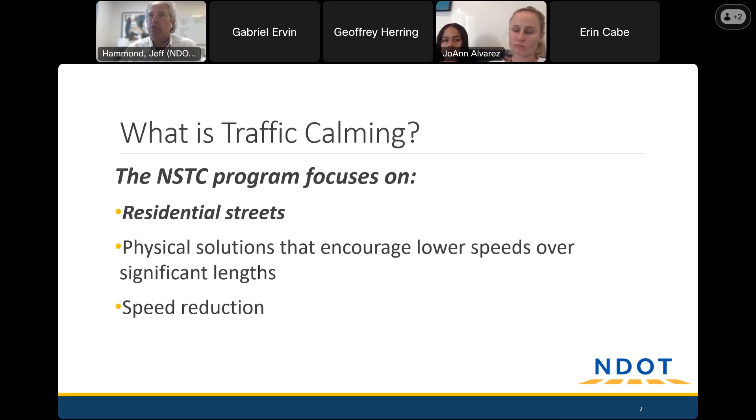We try not to do that. We try to implement measures that will make people slow down, but not necessarily push them to other streets. That's not one of our objectives.

How Oakley got inducted into the program is that it follows a pretty set procedure. There was an application placed by the neighborhood or individuals within the neighborhood.

That can go back several years. I don't know exactly when Oakley's application came in, but often we have neighborhoods where someone put that application in several years ago. Every time we get applications in, we go out and collect data on the street.

The other 30% comes from some of the other users on the street, most commonly pedestrians.

So if you have a sidewalk, you get lesser points than if you don't. You all don't have a sidewalk, and that helped boost your score.

If you have destinations that might make sense for people to walk to more, like a school or a park or a library, something like that, your score also goes up for that.

And then there's another 15% that deals with whether there's a documented instance of a crash on the street. So we take that data, roll that all together, come up with a score.

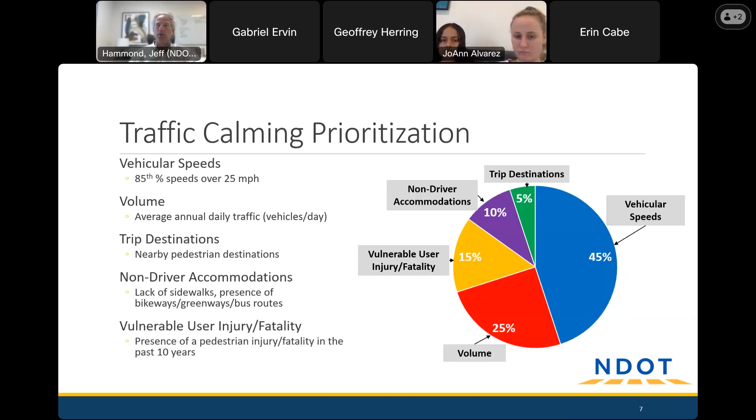Here's some of the data specific to Oakley. By the way, we are going from Trousdale to virtually the end of the street there at Cochran. The speed that we recorded was 35 miles an hour. That 85th percentile is really a statistical way that we in the industry document those speeds. What that says is that 15% of the traffic out there is going faster than 35. So that's all a relative ranking that we use. The traffic volume is about 1,200 cars a day, and the width, I alluded to earlier, is fairly narrow, but not uncommonly narrow - 20 feet wide.

It's kind of standard for our streets. It's actually a little narrower than what today's standard would be. That's a good thing when it comes to speed reduction. The wider the street tends to encourage faster speeds. So we like working on a 20-foot wide road. And then the length of our project is about a half mile long.

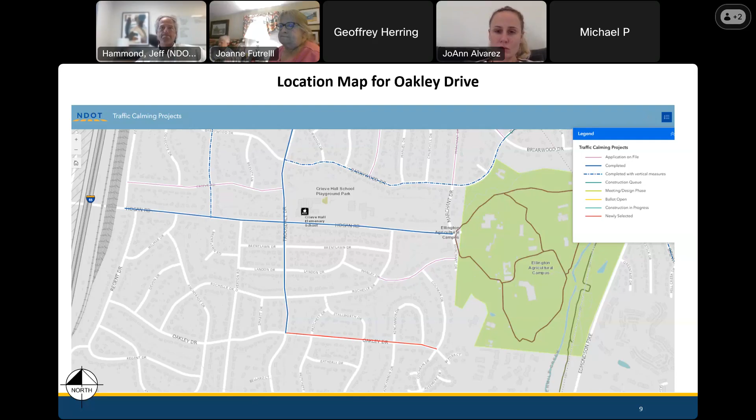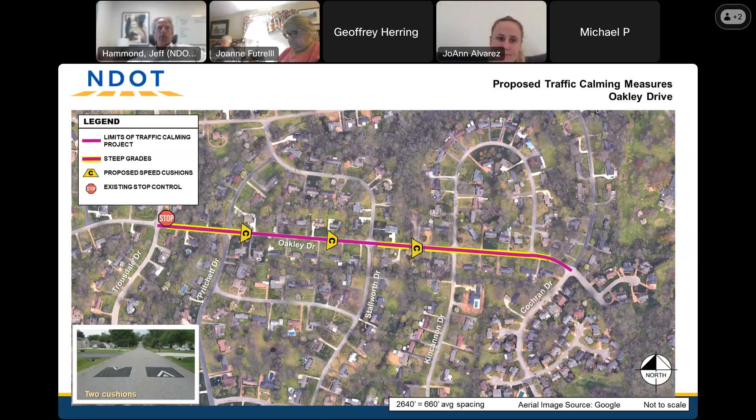I can show you, and this isn't public yet -- we'll be putting these online, but we typically don't do that until we get through these meetings and see if you all have any changes or things you want to tell us about. This is a little more advanced than what we saw at our last meeting; we've done more of the site work. Part of the project will be, we'll come back in.

I know there are white edge lines on the street, but they're in pretty rough shape, so part of the project will be to restripe the white edge lines down both edges of the road. And then we have specified where these speed cushions would be proposed.

The first set is very near 491 Oakley, just a little bit past Pritchett there. That's 50 feet west of the driveway at 491. So as you come in from Trousdale, you would encounter that one set before your driveway.

The next set heading down the hill is at 479. Then the only other set is at 462 before Kincannon. After that, you go back up the hill, and we don't have any toward the end of that street because of the grades.

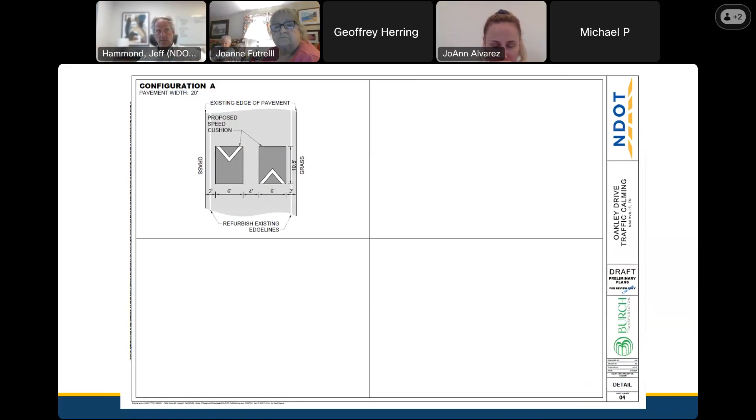Sorry, I didn't catch the last thing you said about that.

I understand you said something about some people leaving the road, and you want to circumvent that. What was the last thing you were discussing? That may have been the last thing, but yeah, we want to make sure no one can get around the speed cushions. That's why we use a set of two.

We have found sometimes if there's a big shoulder, a big flat grassy area, people have actually left the road to try and go around. I don't think we have that situation here. I think you all have more of a defined ditch and maybe some side slopes that are going to keep people from doing that, so I don't foresee that being an issue, but the signs do help discourage that kind of thing too.

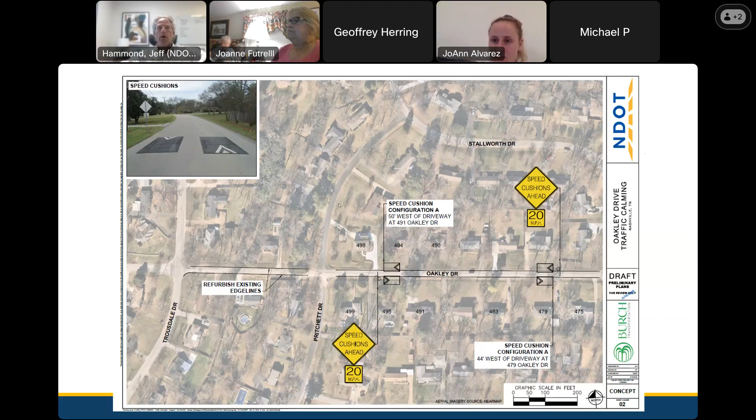Okay, all right, let me talk a little bit about the process from here, and we can always go back if you've got other questions.

And what we will do after tonight is, if there's consensus on where we stand with the plan - and it sounds pretty much like we are - we'll check that other striping question and see if we can get that added in. We will post that online. That'll be on the NDOT traffic calming website. Make sure you know where that is before we break up tonight.

And then we'll move into a ballot process. This is where, as we're mentioning, cities do it a different way, but we do like to make sure everyone's had a chance to look at this process, think about the project, and then have a say on it. It's a ballot process, I'll give you the details of that. And then assuming that passes and is favorable, we move into the construction process.

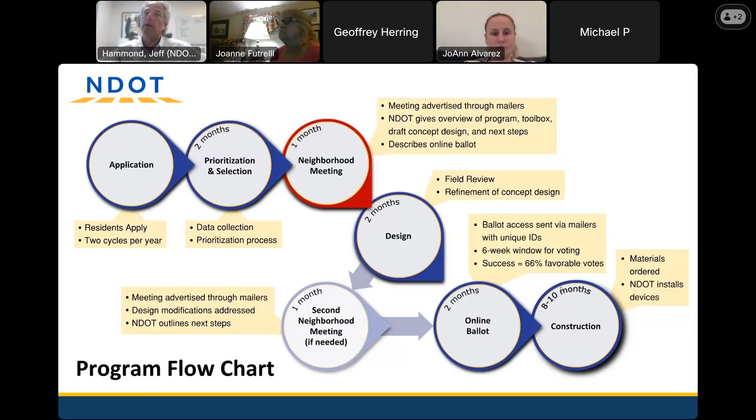We like to show this too because it gives you some idea of time frame, and I don't want anybody to leave tonight thinking there's going to be speed cushions out there in the next month. It's just not that quick. The ballot process is about 2 months by itself, and then right now we have a backlog of construction projects that's close to a year, maybe a little sooner - we say 8 to 10 months. So there's still some time involved at this point.

A little bit about the voting process. What we will do is we will send out cards - you may have received one for this meeting, you may not. If you're in the project limits, you should have. We'll talk about who gets to vote for this in just a second, but we will be sending out cards to the people who are allowed to vote on it, and it basically just has a QR code you can use on your phone, and it goes to a Nashville.gov page.

There you basically just give your information, your address, and whether you're for the project or not. You can also link to the plans there - we want to make sure people know what they're voting for or against, so that information is there as well. That process stays open for 6 weeks. At the end of 6 weeks, we close the ballot, and then we look at those responses.

And if 2/3 of the people who responded have voted for it, we'll move the project forward. We don't care about the number of voters - usually it's just like a real election, it only counts if you vote. So we're not looking for a set number of people who live there.

That does go to the owners of these properties. So if you're renting, or you have a neighbor who is renting and isn't the registered owner, those cards and votes still go to the owners of the property. If anyone owns more than one property, they only get one vote. We're only looking at residential properties. I think everything here is residential, though there may be one vacant piece of property, meaning there's no house on it, just an unimproved lot.

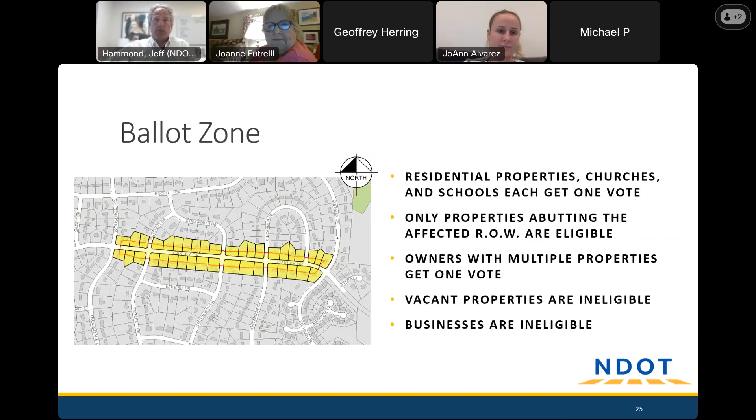That's really all I have tonight. I appreciate everyone joining. Put back my information. Any other thoughts or questions as we wind down here?

Hey Jeff, I know it's kind of late, but did you discuss any other options outside of speed cushions this go around? I know the first meeting we discussed maybe speed limit or radar detection type stuff, or squiggly lines, or anything along those lines. Or I know one neighbor mentioned doing mini roundabouts. If you didn't discuss that previously, do you mind weighing in on that now?

Sure, yeah, we did discuss that last time. We talked more generally about some of the tools in our toolbox for traffic calming projects, because we've kind of settled on a speed cushion based project. We didn't go back through those, but yeah, all of those are certainly options. I think one thing that limits us here a little bit, especially in terms of anything at an intersection, is the width of the road. We just don't have a lot of width to work with, but there certainly are things you could do in terms of pavement markings and things like that. I think the question is the effectiveness. Certainly it's less inconvenient to drive over a speed cushion, but if we just limit it to a pavement marking based project, you're probably not going to see the same level of speed reduction.

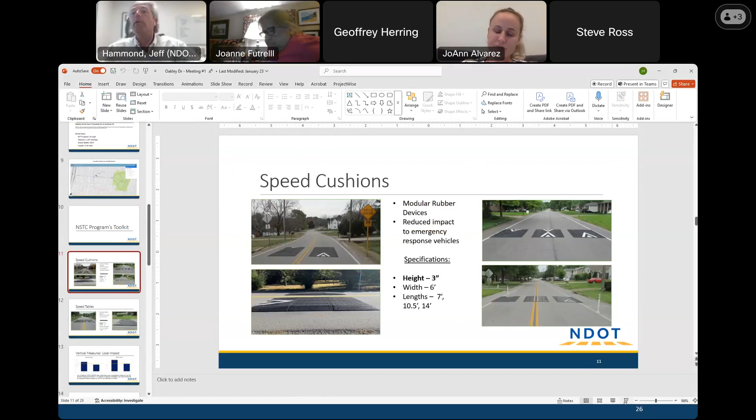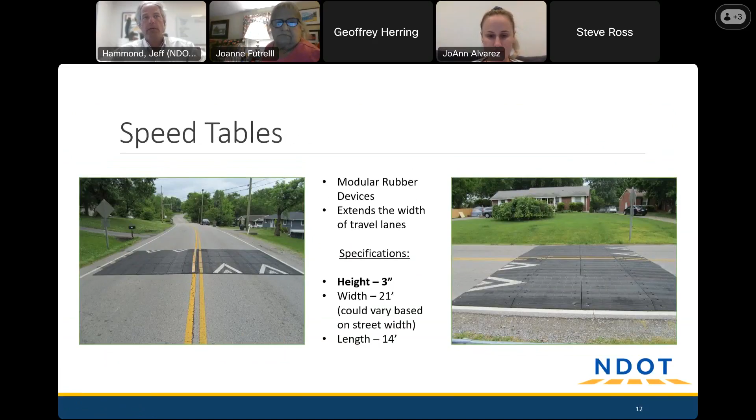Again, that meeting is recorded, so if you want to see the full context, that's available as well. These are the slides from that first meeting. We talked about the speed cushions, speed tables. I think it's a close cousin to the speed cushion or tables, just a different configuration. We have some before and after data.

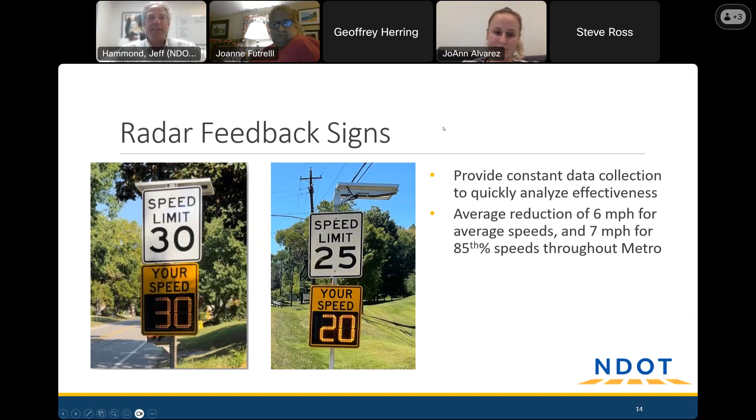This is one of the tools we were talking about, the feedback sign. You're probably familiar with those. We do have some before and after data that speaks to their effectiveness. I think the question is, in the long term, how long does that effectiveness hold out? That's something NDOT is still gathering information about. Some people swear by them and say it absolutely made a difference, and other people not so much.

Respectfully, I think all it does is tell me I'm speeding. It doesn't change whether I put my foot on the accelerator or the brake. It just simply says you're doing 37 when you're coming down the hill on Trousdale. I don't see anybody applying their brakes. It just acknowledges we're speeding.

Yeah, I think it would do the same here, especially since there are no cops out giving tickets, particularly when it's not a real throughway like this neighborhood. You all drive this street every day, so you'll certainly get used to seeing that every day. Pavement marking can be effective, especially if the street is really wide unlike this one. Sometimes if we can visually narrow the street with pavement marking, that can help.

And y'all may be familiar with Blackman, where there were some zigzags and creative things tried. Blackman's a unique case because speeding is very high, but it also has a very high traffic volume, way above the threshold we use for something like a speed cushion, which is 5,000 cars a day. It's probably close to 15,000, like 3 times the amount. So it's been a real dilemma on how to slow traffic on a street like Blackman, but in any case, some things like pavement markings were attempted.

There are some bigger applications of pavement markings. This is when you have big intersections and typically more urban areas with more traffic and pedestrian activity. We can do things like bulb outs, where we effectively shorten the turning radius to bring about slower speeds for cars turning in and out of an intersection. That has its place, but here that's probably not so much the issue as it is just speeding along the corridor.

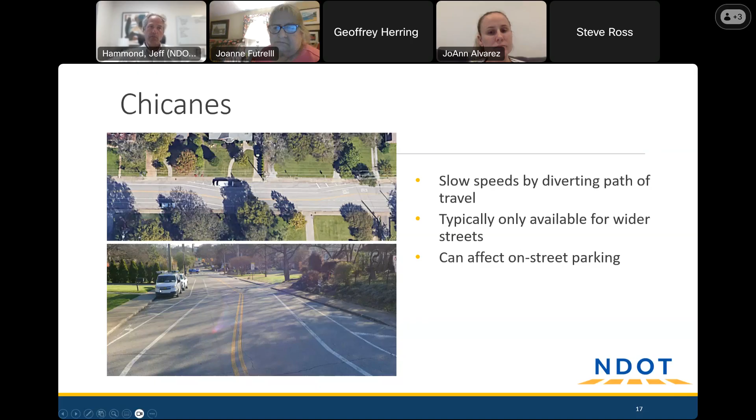Chicanes are an urban type of treatment that's been done, not very much in Davidson County. There are only 2 or 3 streets that have these, but it introduces an artificial meandering of the street. It can be effective when you have things like on-street parking, which really gives you something you have to slow down to avoid, like a parked car.

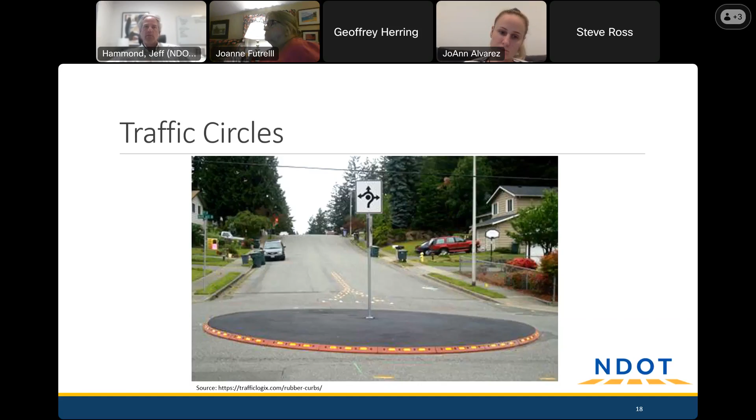And then traffic circles, we did mention, again, it takes an awful lot of pavement, a very big intersection. These are done, I would say, infrequently still by NDOT. There are some cases where they can bring about unintended consequences, things like school buses having a hard time, so the conditions have to be just right for these to work well without resulting in some of those difficulties. So those are the tools we really have in the toolbox of traffic calming.

Anyway, we're certainly open to relooking at that. But I don't see as an effective solution whether it's a pavement marking or a radar feedback sign, which are probably the 2 more leading candidates. And I think, JoAnn, something you mentioned there.